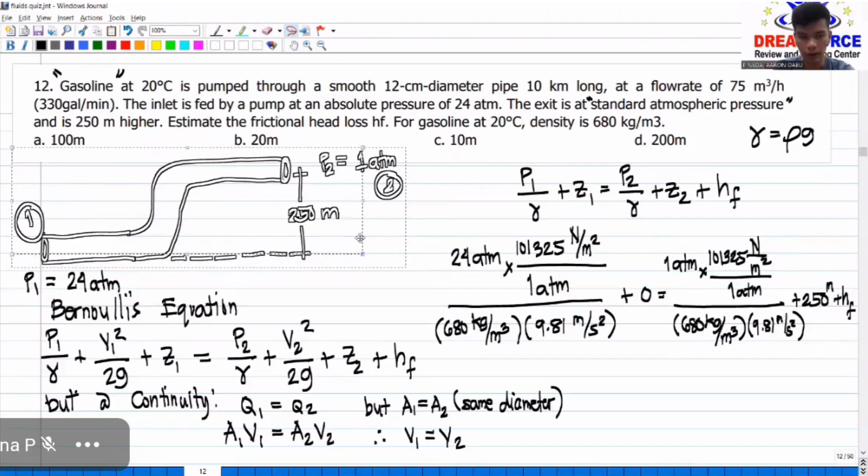Yan. So, i-shift solve na lang natin yung calculator.

We can now solve for the head loss. Sige, yung left side natin, 24 times 101,325. Next, 680 times 9.81. Dito naman, plus 0. So ang gawin siguro natin, lipat natin lahat sa kaliwa para maganda na lang.

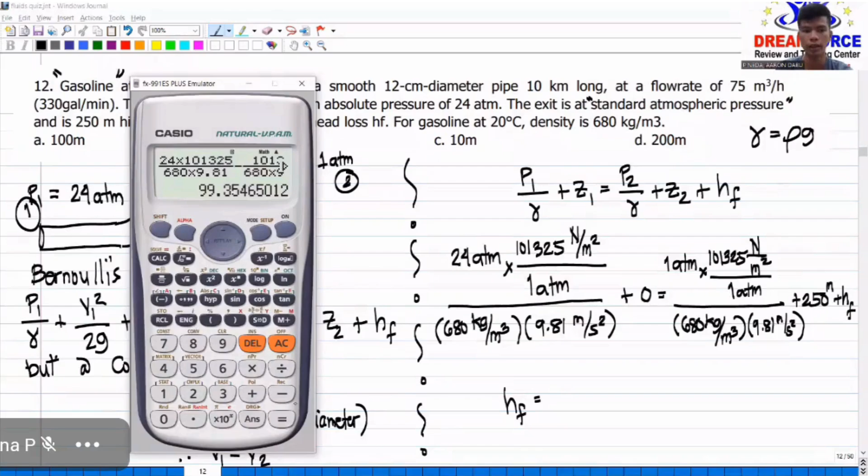Para hindi na tayo mag-shift solve. So dito, 101,325. Tapos, 680 times 9.81. Lipat din natin yung 250, magiging minus. So natitira na sa kanan yung head loss, which is 99.35 meters. And the answer is letter A.

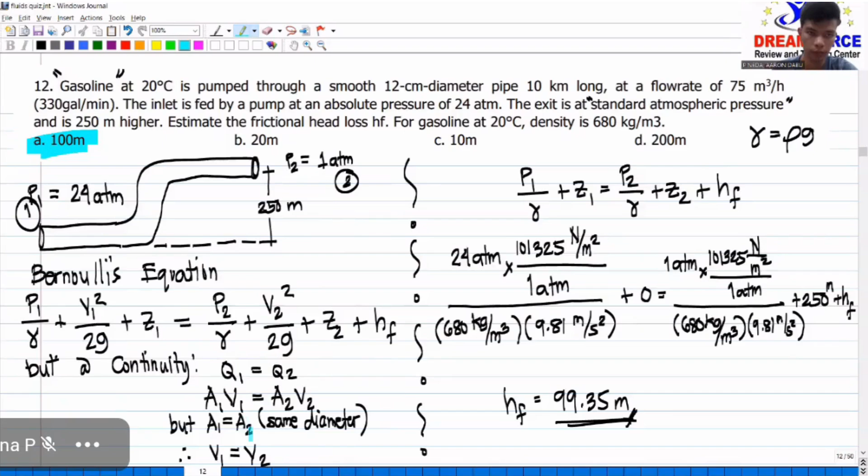Number 13. Alcohol is used in manometers because it can provide longer column due to low density.

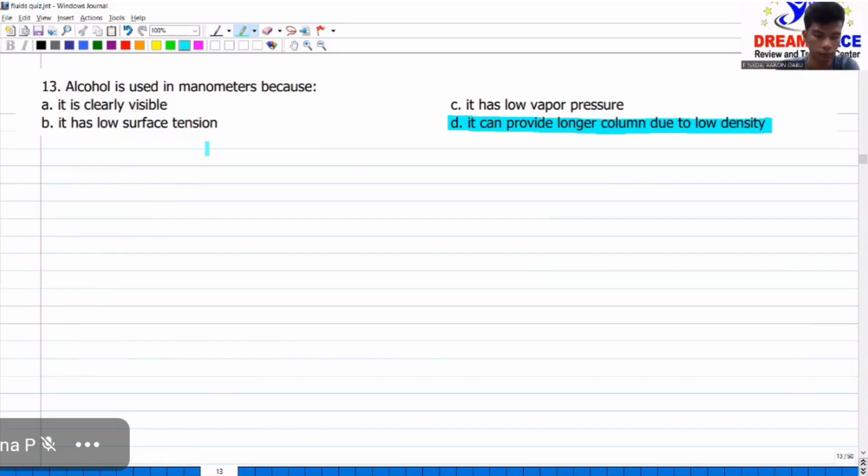Number 14. To compute the loss of head in 300 feet of horizontal 6-inch diameter asphalted cast iron pipe carrying water with a mean velocity of 6 feet per second, assuming the density of water to be 1.94 slugs per cubic feet and friction of 0.02, parang frictional constant of 0.02.

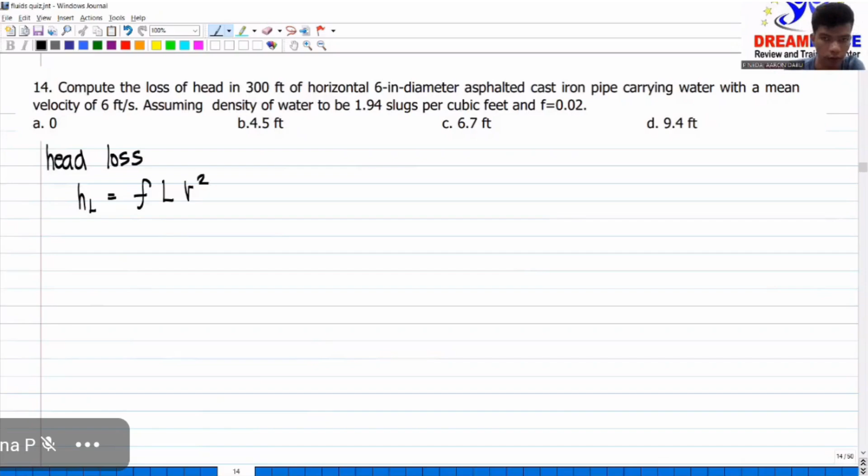So the question is head loss. Formula based lang ito from the lecture, di ba? The head loss is letter F times the length times the velocity raised to 2 divided by the diameter and 2 times the gravity. Direct substitution ata ito. Tingnan natin.

So yung F natin is 0.02. The length is 300 feet. And then the velocity, the mean velocity given is 6 feet per second. So in terms of feet tayo and second. The diameter is 6 inches. So ito gawin nating feet. In 1 foot, there are 12 inches. And then let us use the gravitational acceleration in feet per square second, and that is 32.2 feet per square second.

So ano ang ititira sa atin dito? Magka-cancel ang inch, and then ano pa? Magka-cancel yung seconds, or naka-square pala to. Kaya pala naguguluhan ako, so naka-square kasi ang velocity. So magkakaroon tayo ng 3 feet sa taas, di ba? Kasi naka-feet square ito.

Ito yung magka-cancel. Sige, cancel natin to. And then dahil naka-feet square ito per second square, mawawala itong dalawa na to. May matitirang feet for our final answer.

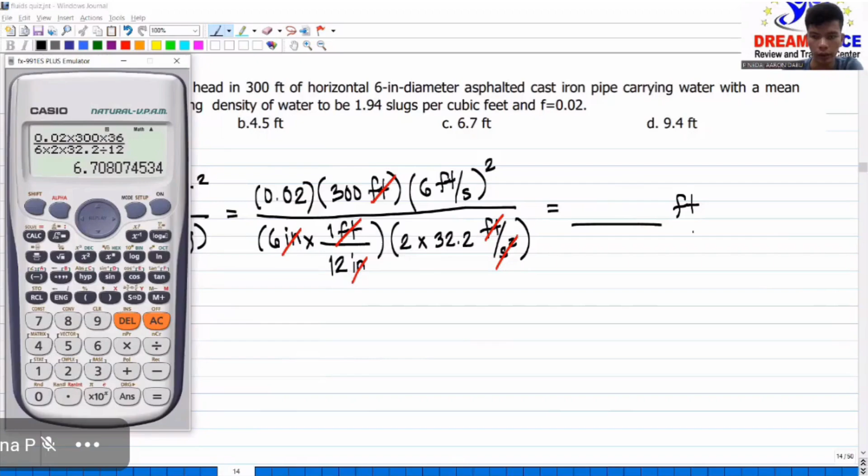Well, 0.02 times 300 times 6 raised to 2, 6 times 2 times 32.2 divided by 12. 6.71 feet. That is letter C.

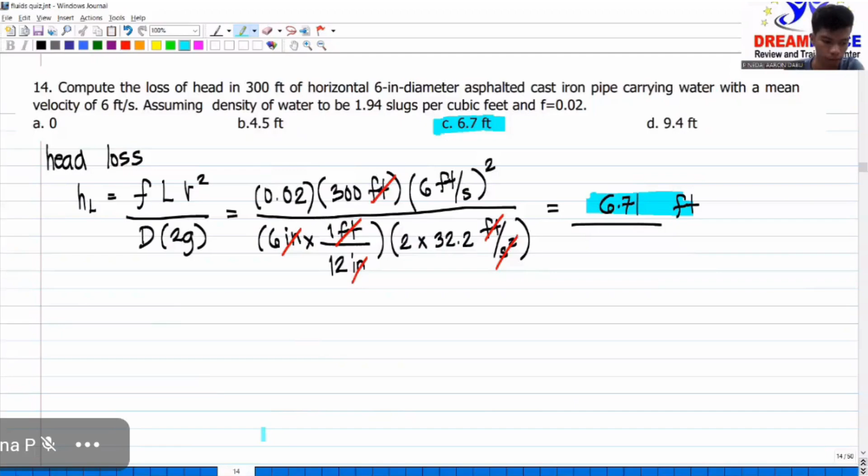Number 15. Compute the pressure drop in 300 feet of horizontal 6-inch diameter asphalted cast iron pipe carrying water with a mean velocity of 6 feet per second, assuming density of water to be 1.94 slugs per cubic feet, and F is 0.02.

So same problem with number 14, iba lang yung question, pressure drop. If we are going to solve for the pressure drop or the change in pressure, that is the F, L, V raised to 2 over 2D times density pa to.

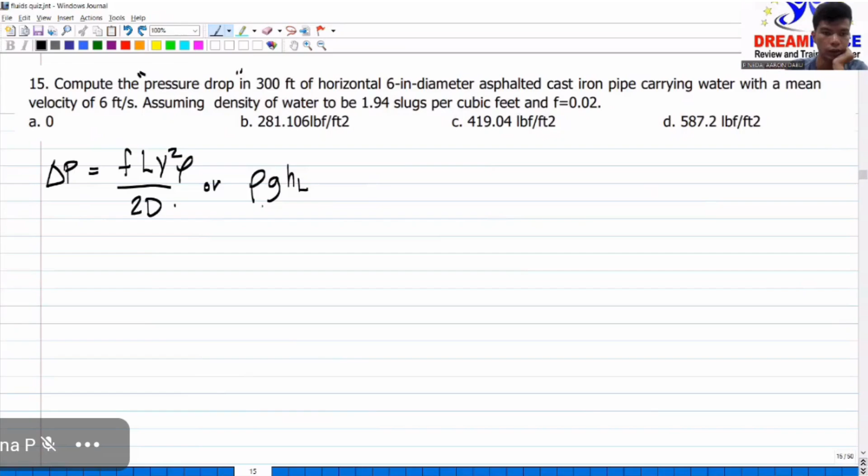Or simply, kung tama yung answer ninyo sa 14, madali na lang yung na-answer. And that is rho times G times yung head loss. Kasi di ba originally the head loss is ito, FLV square over D 2G. So ito din yun, FLV square over 2D. So kung gusto natin magkaroon ng G dito, meron G dito sa numerator. So ito na lang gamitin natin, rho G times the head loss na nakakompute natin.

So therefore, the change in pressure will be, ano ulit ang involved? Water. So water ang involved dito. The rho G is, sige, para mas mabilis, ang rho G kasi is the specific weight of water. And the specific weight of water in English units is 62.4 pound force per cubic feet.

And what is the answer natin? Kanina, 6.71. So times 6.71 feet. So pound per square feet yung answer natin dito. Times 62.4. 418.58.

Okay? Pound force per square feet. So that is letter C. Sige, palabasin pa natin yung letter C using the formula.

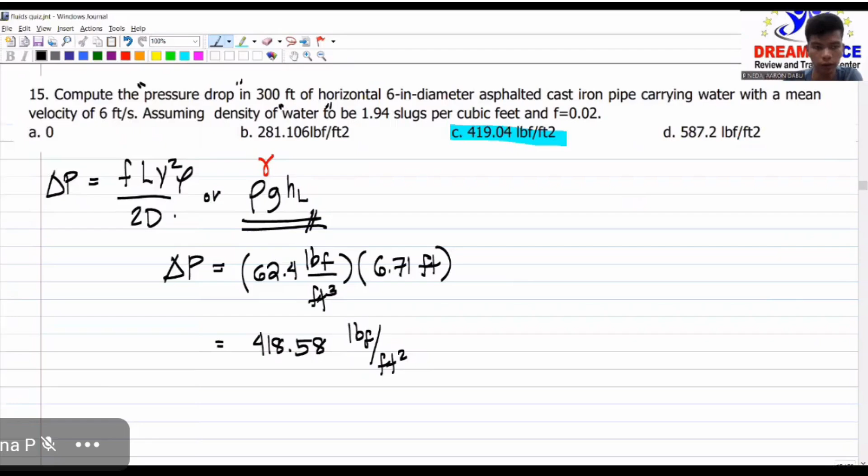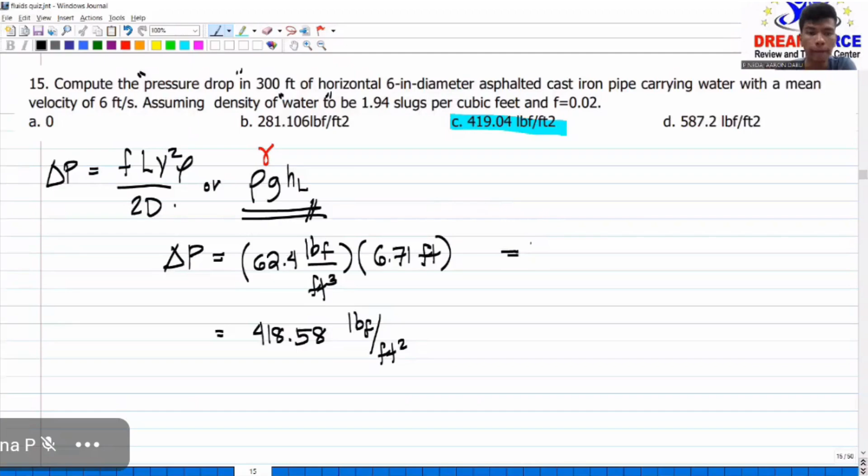Sige, kung ayaw natin, binigay kasi yung density ng water, di ba? The density of the water, 1.94 slugs per cubic feet. Sige, 1.94 slugs per cubic feet, that is the density, times the gravity, 32.2 feet per square second, multiply natin sa 6.71 feet. So ano ang mangyayari dito?

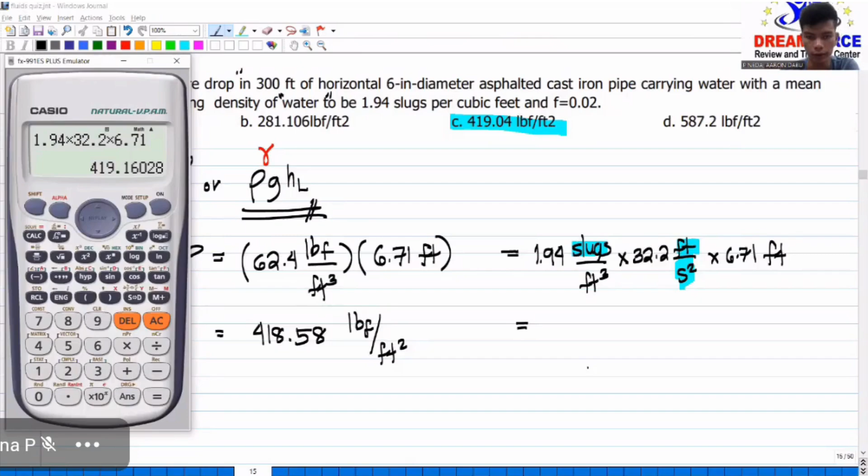Slugs, feet per square second, that will become pound force na din, di ba? Per square feet na yung answer natin. 1.94 times 32.2 times 6.71. 419.16. Yeah.

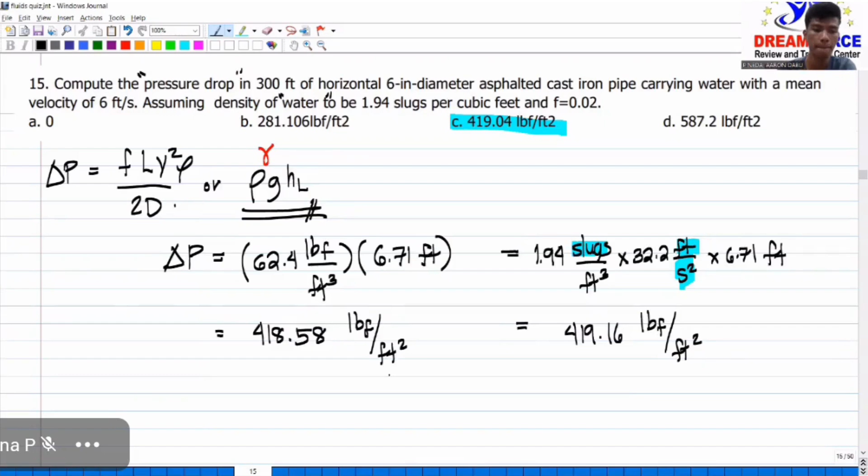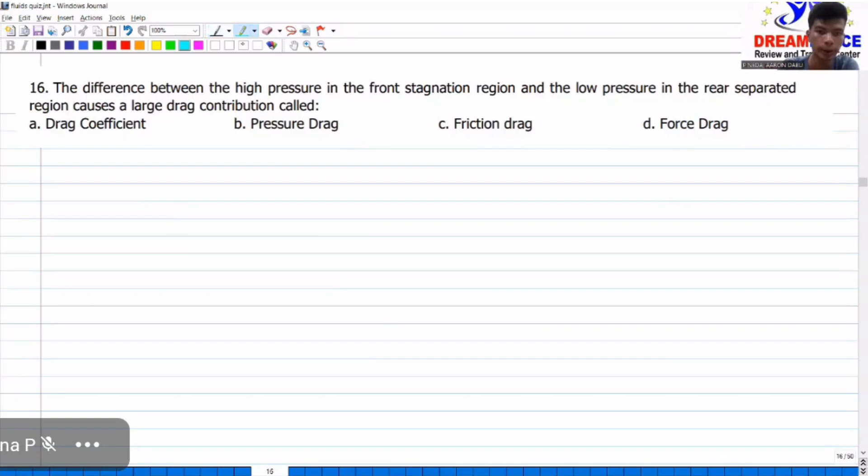Number 16. The difference between the high pressure in front stagnation region and the low pressure in the rear separated region causes a large drag contribution called pressure drag, letter B.

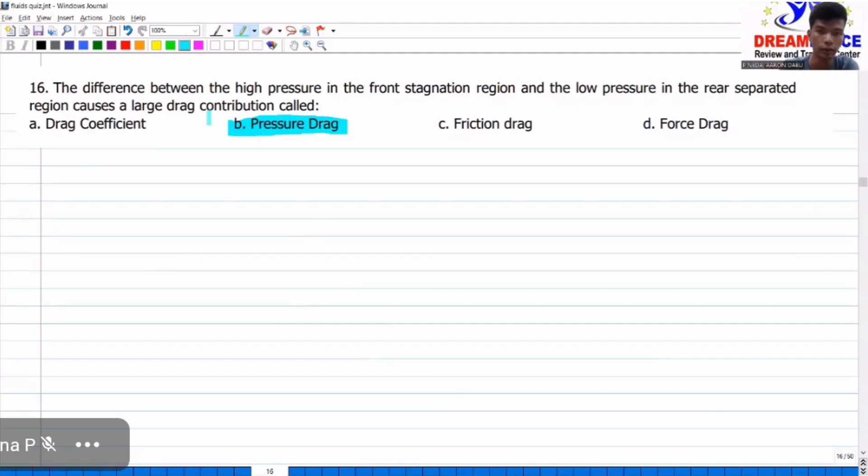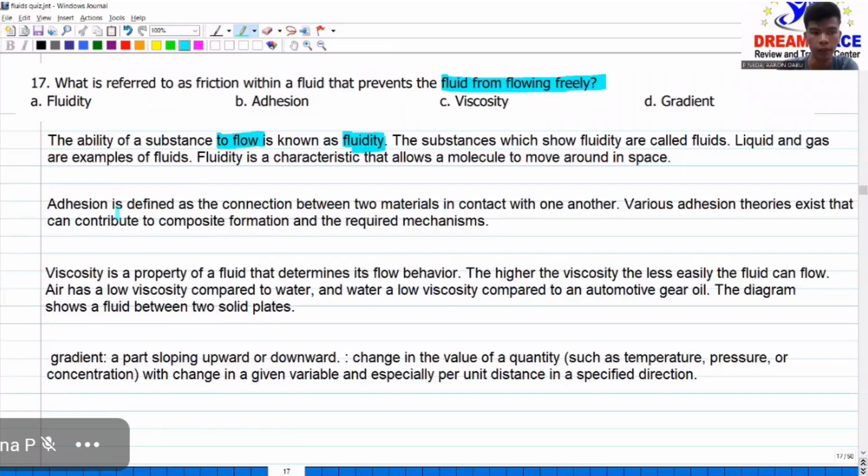Next, number 17. What is referred to as friction within a fluid that prevents the fluid from flowing freely? Kung titingnan ninyo yung fluidity, this is the ability of the substance to flow. Next, yung adhesion naman is the connection between two materials, yung pagkakadikit. And dito naman, viscosity is a property of a fluid that determines its flow behavior.

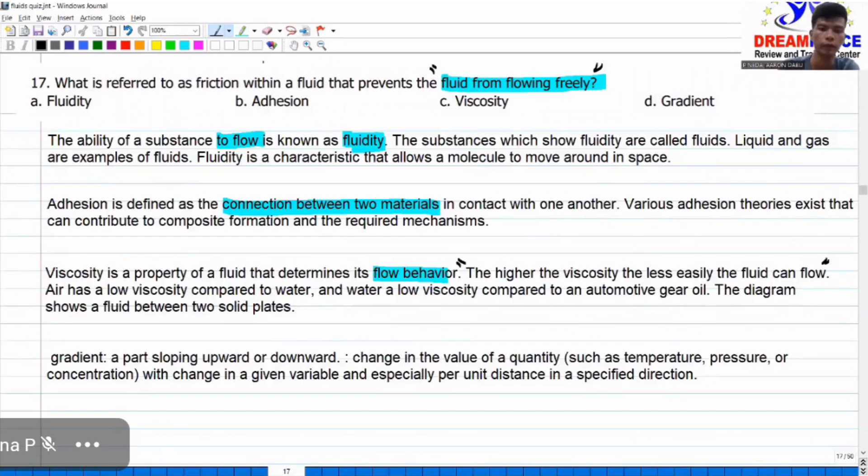So baka si viscosity ang answer natin. The higher the viscosity, the less easily the fluid can flow. So pinag-uusapan natin sa question natin yung characteristic ng pag-flow ng fluid, di ba? And sinabi dito sa viscosity na mas mataas na viscosity, mas mahirap mag-flow. So our answer is letter C, viscosity yan.

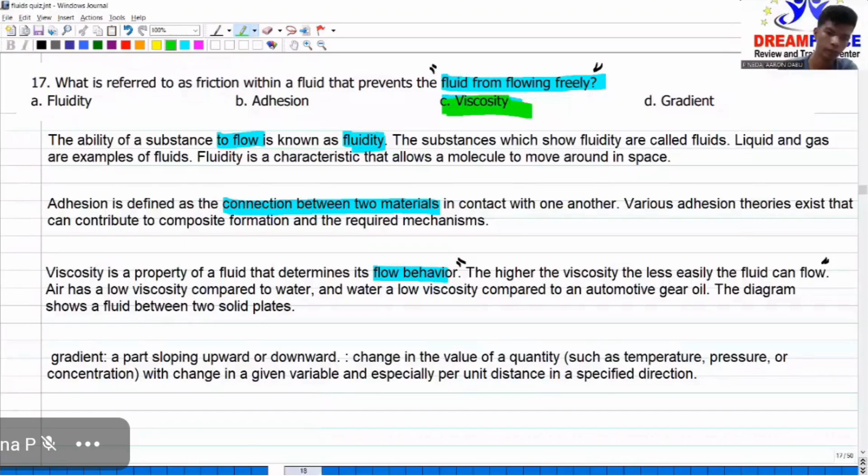If the Reynolds number is less than 4,000, what is the classification of the fluid flow? May tatlong classification tayo gamit ang Reynolds number. Kapag ang Reynolds number ay greater than 4,000, the answer is turbulent. Kapag naman ang Reynolds number ay nasa gitna ng 2,300 hanggang 4,000, transitional or critical flow. And kapag ang Reynolds number ay mas mababa sa 2,300, the flow is laminar.

Pero mapapansin niyo sa question, the Reynolds number is less than 4,000. Kapag ang Reynolds number is less than 4,000, dalawa ang pwedeng maging sagot: critical flow o laminar flow. So medyo nakakalito yung question, di ba? Kasi less than 4,000, wala namang ganun - dalawa yung magiging answer. Pumapasok sa answer si critical at si laminar. The question is troubleshoot, so yung less than 4,000,

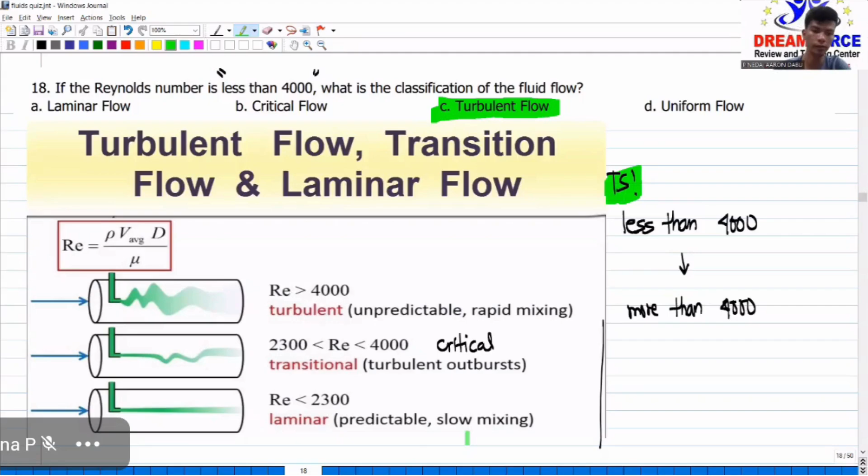Number 19. The resultant upward pressure of a fluid on a floating body is equal to the weight of the fluid displaced by the body, and that is the buoyant force, di ba? This definition, baka malilito tayo sa dalawa, between the Archimedes principle at buoyancy. Kasi parehas pinag-uusapan dyan yung buoyant force. Pero ang Archimedes principle ay states that a body immersed in a fluid experiences an upthrust equal to the weight of the fluid displaced.

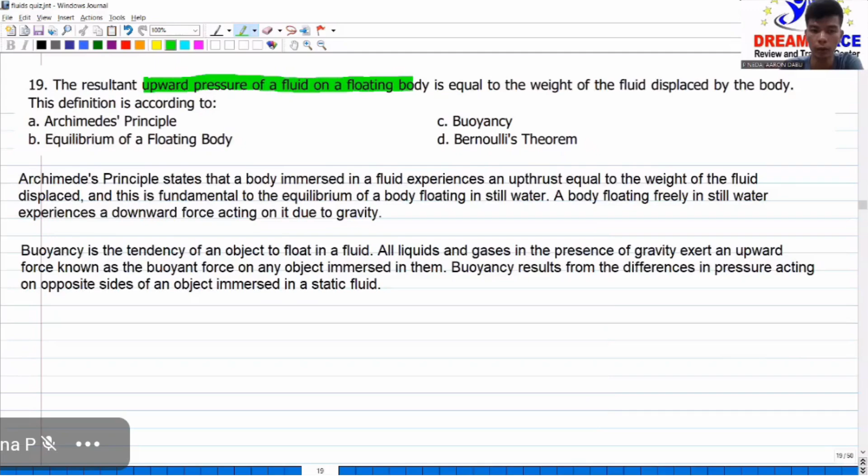Ang buoyancy naman is the tendency of an object to float in a fluid. Siyempre masusundan natin kung sino talaga ang nagbigay ng meaning na ang upward force or pressure na naranasan ng isang floating body ay equal to the weight of the fluid displaced. Ayan ay sinasabi ni Archimedes. Letter A.

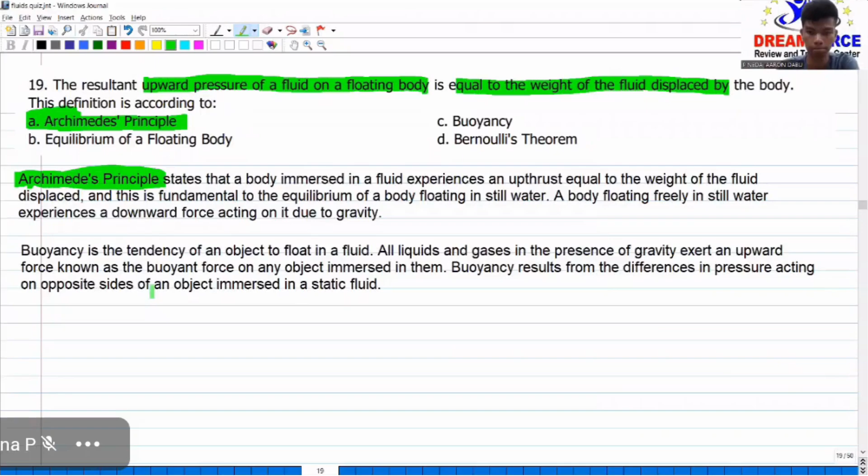Number 20. For lifting bodies, the angle between the free stream and the chord line is called - the angle between the chord line and the flight direction is called the angle of attack. Letter A.

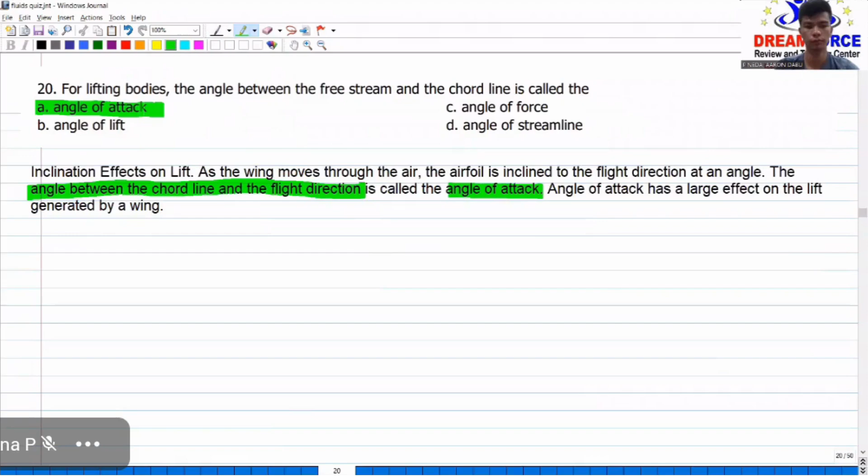Number 21. Free surface of a liquid tends to contract to the smallest possible area due to the force of surface tension. Kapag may nakita kayong pumatak na tubig sa isang surface o kaya sa water, parang nahihiya siyang kumalat. Ayun yung tinatawag na smallest possible area because of the surface tension. Kailangan mo pang galawin ang tubig para kumalat.

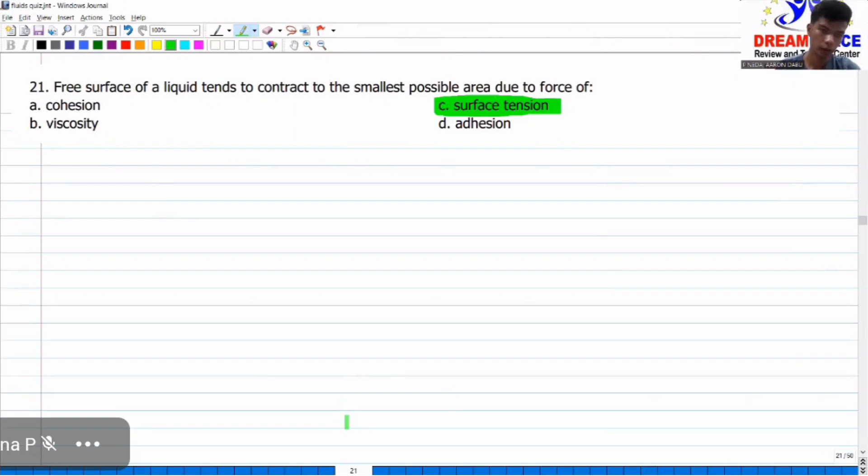Number 22. Viscosity for a fluid is defined as the constant of proportionality between shear stress and another variable. So this is the shear stress. Sabi dito, viscosity is the ratio of the shearing stress and the velocity gradient. So from the word velocity, the answer is letter C, spatial derivative of velocity. Ang ibig sabihin kasi ng gradient ay parang change, change in velocity with respect to distance.

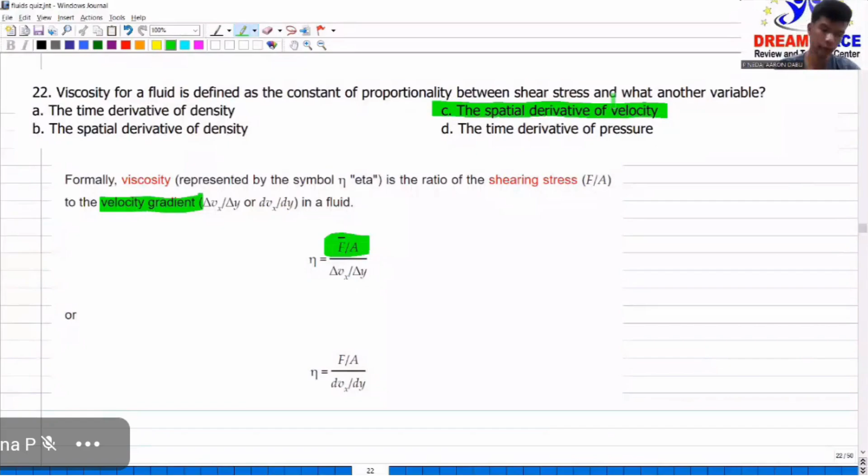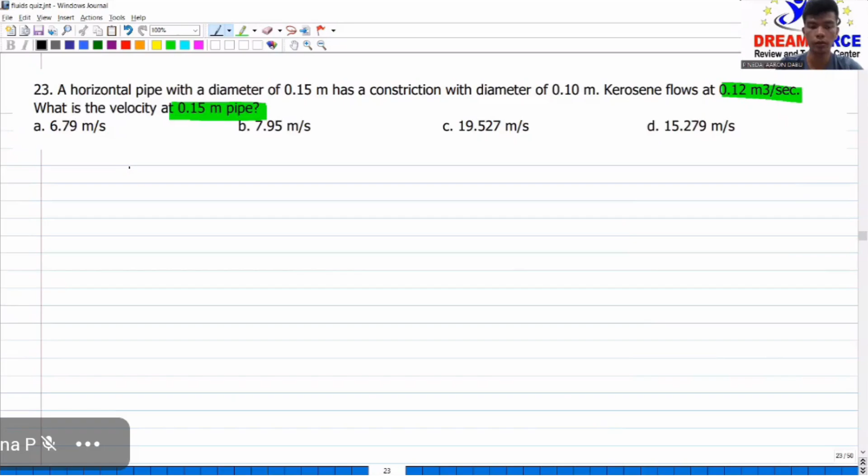Number 23. A horizontal pipe with a diameter of 0.15 meters has a constriction with diameter of 0.10 meters. Kerosene flows at a rate of 0.12 cubic meters per second. What is the velocity at the 0.15 meters pipe? Madali lang itong question kasi given na ang diameter ng pipe natin at given din ang flow rate. So we can use the formula for the flow rate, which is equal to the area times the velocity. And if we are going to solve for the velocity, that is equal to the flow rate over the given area. Ang flow rate natin is 0.12 cubic meters per second, and the area natin ay masosolve natin using pi d squared over 4 kasi may given na diameter. So the area is pi over 4 times diameter raised to 2, in meters squared. Ang matitirang unit dito ay meter per second na.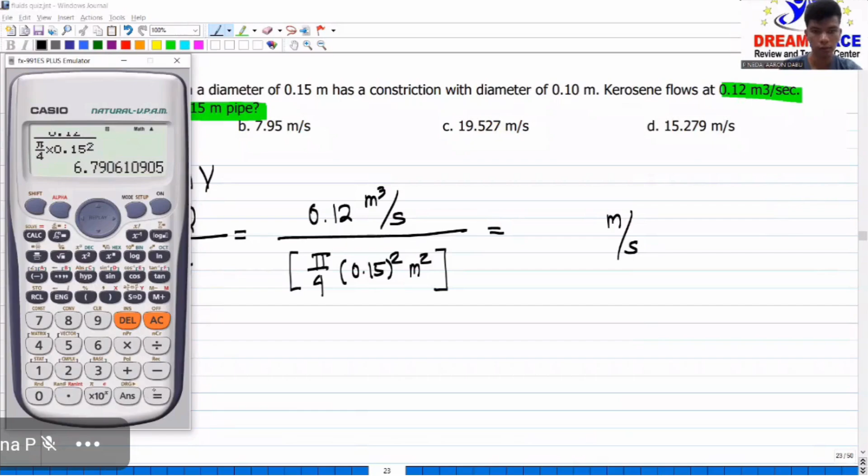So 0.12 divided by pi over 4 times 0.15 raised to 2. Mali ito kasi nasa labas, dapat buong nasa loob. Ulitin ko na lang: 0.12 divided by pi over 4 times 0.15 raised to 2. Okay, 6.79. That is letter A.

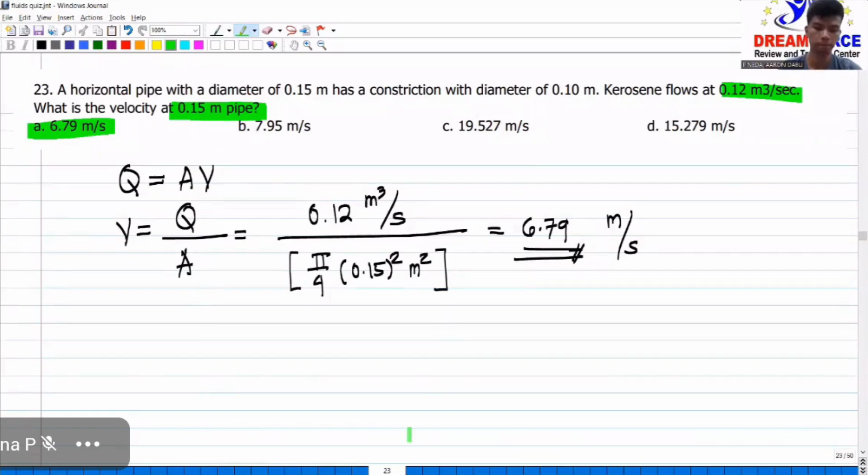Number 24. A cylindrical shape which is long compared with its height is formed by a source sink pair aligned parallel to a uniform stream - that is the Rankine oval.

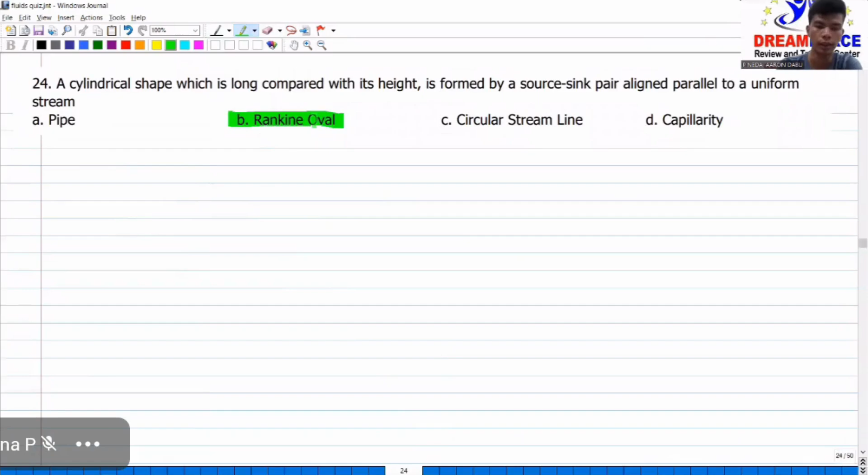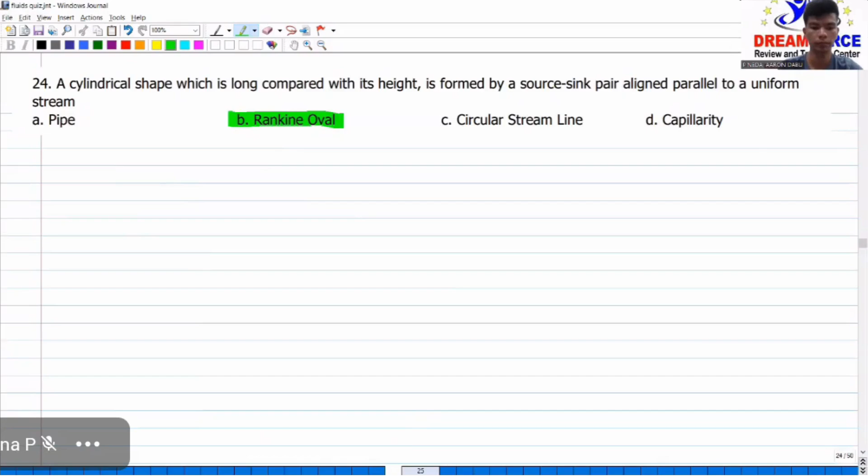Number 25. Summation of all heads - we've mentioned this before, we've used it already. The pressure head, the velocity head, and the elevation head - that is Bernoulli's principle.